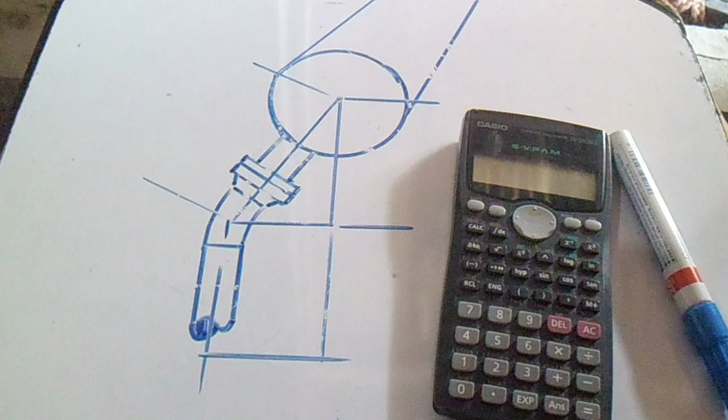So this is my video regarding how to compute the length of side and how to compute the angle, okay?

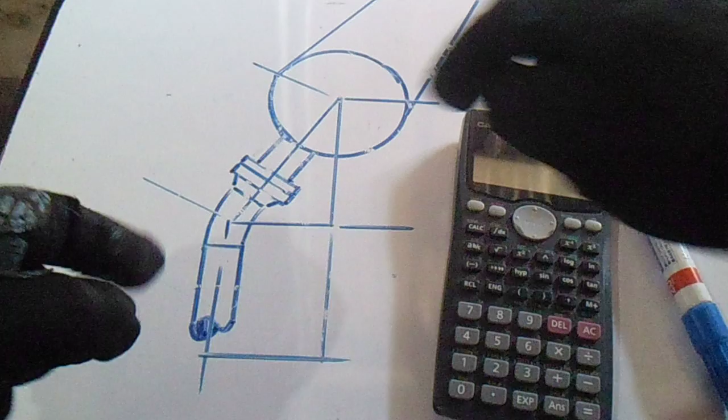So this is my drawing. We have a vessel here, and we have a spool, we have elbow, we have flange connecting to the drum or vessel, okay? So now we will compute the length or the angle. Which one will we do first? Okay, first we will compute the angle.

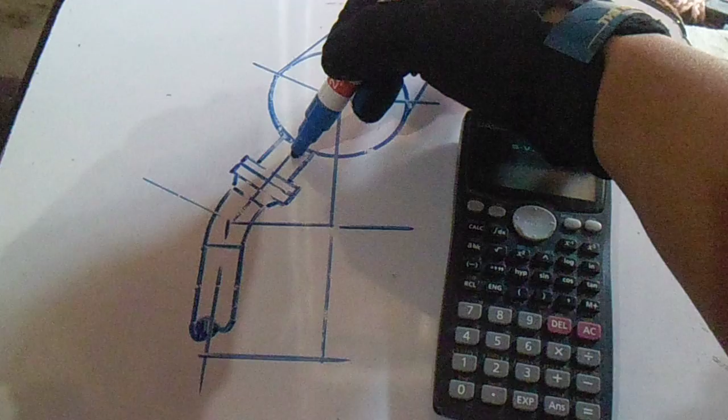With what angle is this pipe connecting to this vessel, okay? We will compute this. So this is the angle. We will find that, but we have a dimension here, and this is our travel, and this is our set, okay?

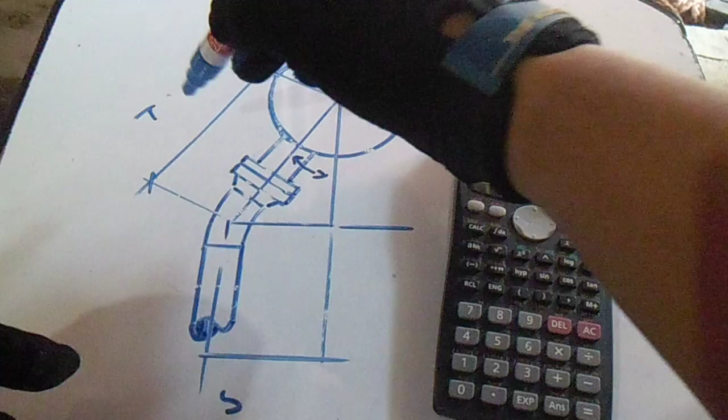So let's say we have a 20 here, and we have a 15 here. So this is our set, and travel is 20. So we will compute the angle. So this is the angle. What angle is this pipe connecting to the vessel, okay?

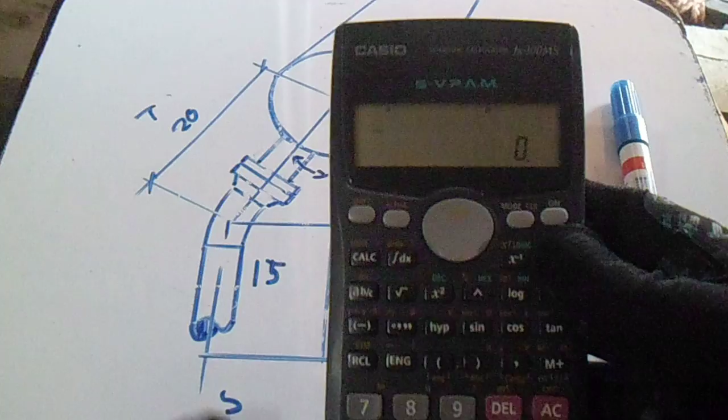Using this FX100 MS. To find that, the formula is set divided by travel equals sine, okay? Our set is 15. So 15 divided by 20 equals, oh sorry, 15 divided by 20. So this is answer 0.75.

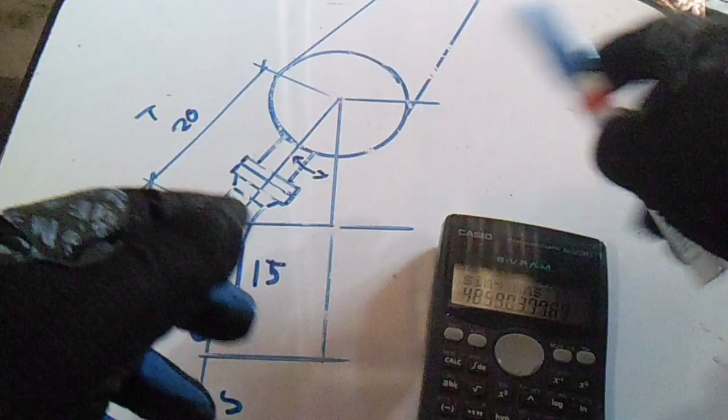Now, to find the degree, just press the shift, and then sine, equals. So this is the answer. Okay, this is our degrees. So we have a degrees of 48.5. So this is 48.5 degrees. Okay.

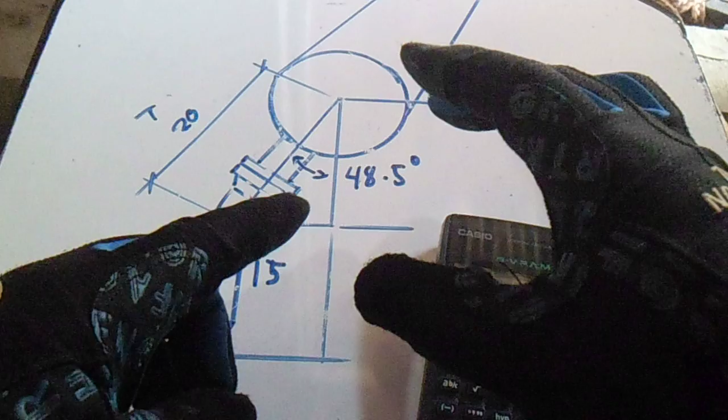Okay, to know if we have correct degrees, correct computation, we will get now the set, okay? So we have an answer of 15 if our degrees are correct. So let's say we will find this set. Remember we have 15 here. Okay, so to find that, our travel is 20.

20 multiplied by sine 48.5. Okay, so we have correct computation, right? So our answer is 14.9. So round it off, this is 15. Remember, this is 15. Our answer is 14.9. Just round it off, this is 15.

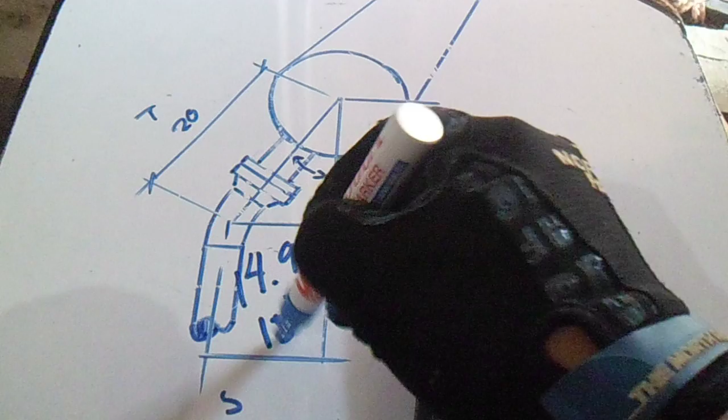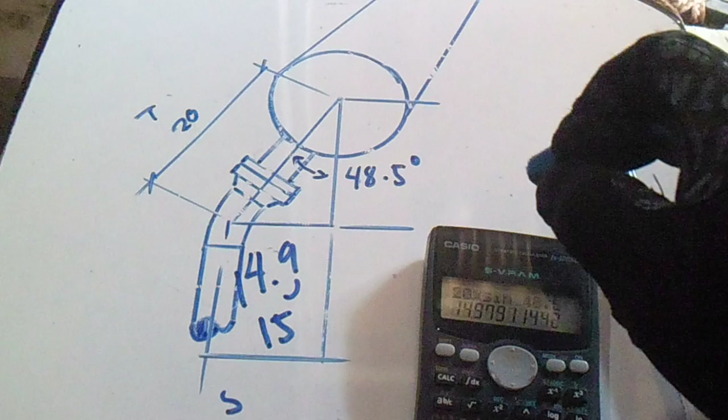Okay, so this is how to compute the length of side and how to compute the degrees. Just vice versa, compute the degrees and travel, if we have correct answer. Okay, so we have no answer for our run, so we will compute that.

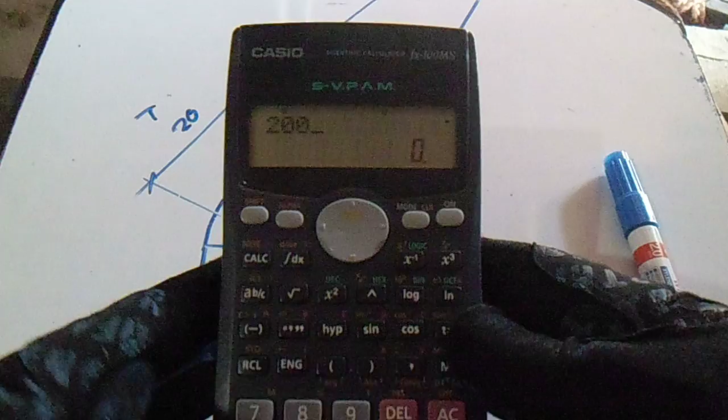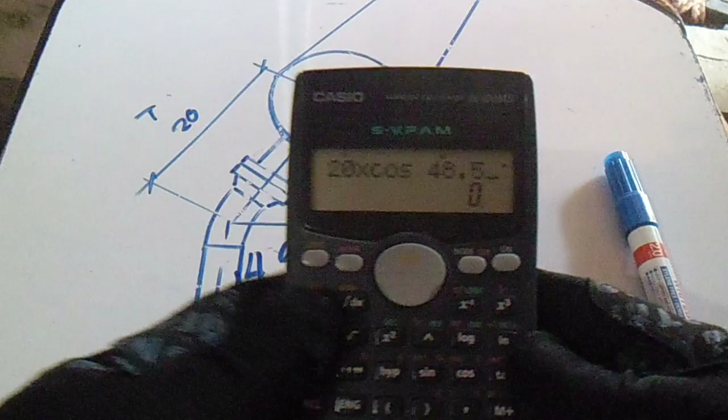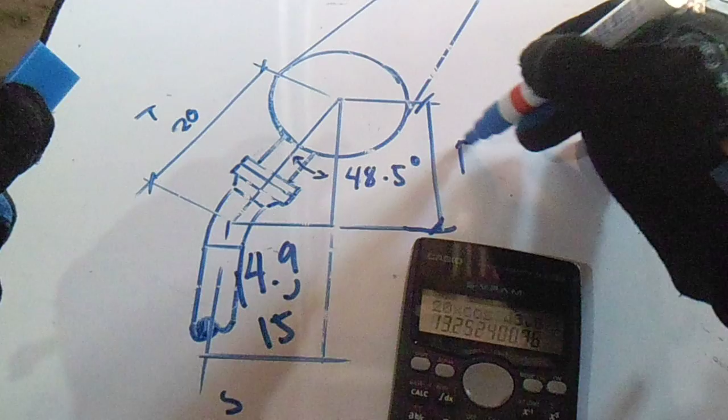So travel 20 cosine. 20 multiplied by cosine 48.5. So this is our answer for the run. So I use cosine to get the run. Okay, so answer is 13.2. So this is our run, and this is 13.2. Okay.